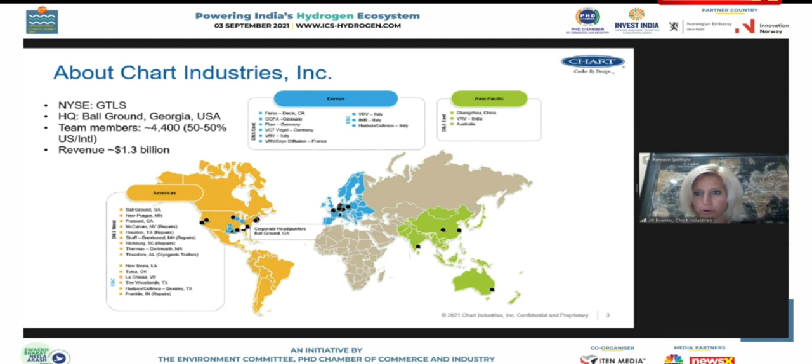I expect that will continue to unfold as the clean energy transition unfolds, in particular because there's varying degrees of funding, varying degrees of support in the current state for the different renewables that are growing and growing between now and 2040. This is a set of pictures of the different types of equipment, and it's very important that we think about this around the fact that you need infrastructure in order to achieve any of the targets that are out there.

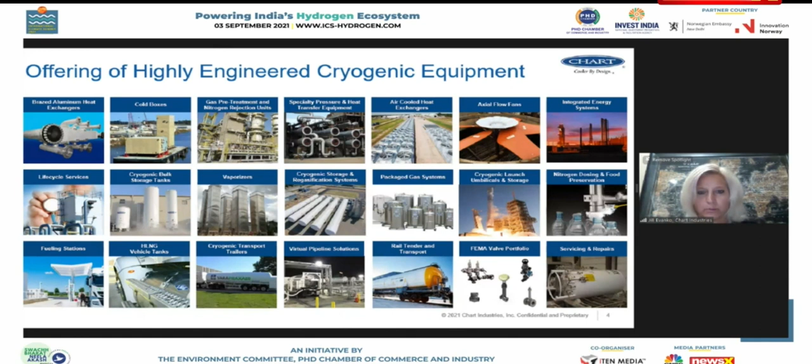So I show these pictures to show the variety of need of infrastructure, and I'll go into some descriptions of these, but all of these are really utilized in the combination of how clean works together. So clean being sustainability, being around ESG, and this isn't just around clean power, it is the combination of water and power and industrials. And that's something that's very important when you think about how the next decade is going to unfold, in particular around renewables.

I show this because it really is, how do you create the opportunities for the variety of different applications to work together in what surely will be that hybrid of solutions.

It's also important in the discussion when we're talking about how to fund, that we talk about the industry groups that participate in the energy transition and how you participate in industry groups such as Hydrogen Council, such as the India Hydrogen Alliance, in order for the industry to build upon itself and to find those various different ways of funding, whether that's green funds or other ways to get the money to kickstart the economy that is still very nascent.

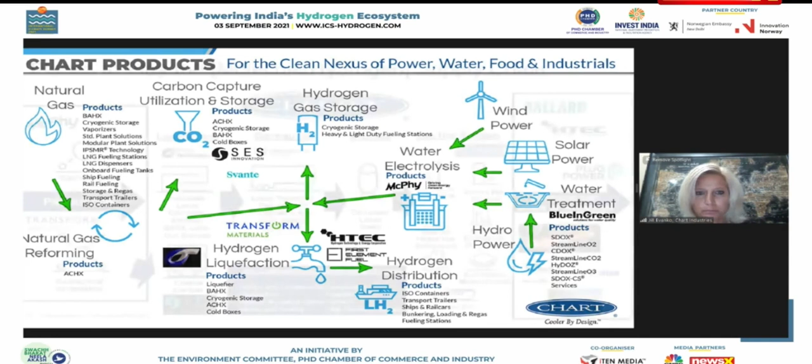As we talk about hydrogen, this is the value chain that I briefly spoke of at the beginning, and you can see that there's a variety of different pieces and parts in this. Perhaps the most important part of the discussion is, how do we get into the projects and get them moving, and what are the right projects for hydrogen, so that we can have this be a cost competitive part of the solution, as well as have it be scalable.

That's what you see really in the natural gas economy. That's what you also see in diesel. So we're talking about having the funding and having the investment in order to drive cost competitive and scalability for the hydrogen molecule when you compare it to other answers for power and fuel. So how do we achieve that?

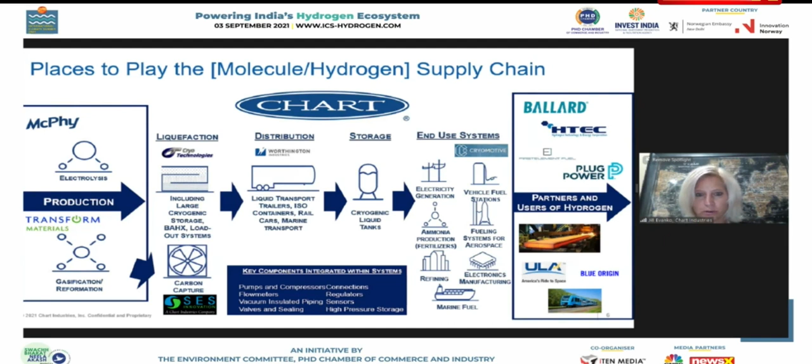First, let's step back to the macro picture of what's happening in the hydrogen economy. First of all, hydrogen is hot, and I say that somewhat jokingly because it's actually one of the coldest molecules at negative 423 degrees in the market. But we've been manufacturing hydrogen equipment for over 56 years, and it really wasn't until the last couple of years where it became a topic that was very real and tangible in the market as part of the drive for the solution to clean.

So you can see on the left-hand side that there's over $500 billion of investment in projects that have been announced in the last 12 months. 150 billion of that 500 billion investment has been announced since February of this year.

So the increase in funding and availability of capital to do these projects is a key part of the change that's been happening in the hydrogen industry. Historically, hydrogen was really used in space applications, space exploration, whether that was the Indian Space Research Organization or NASA in the United States. And now you're seeing it utilized across a variety of different applications that I showed on my last slide.

So there's also a perfect storm of activity, whether public or private sector, happening right now. If you look at the various governments around the world, you see 31 different countries that have national hydrogen strategies. Of those 31, more than half announced those strategies in 2021 alone.

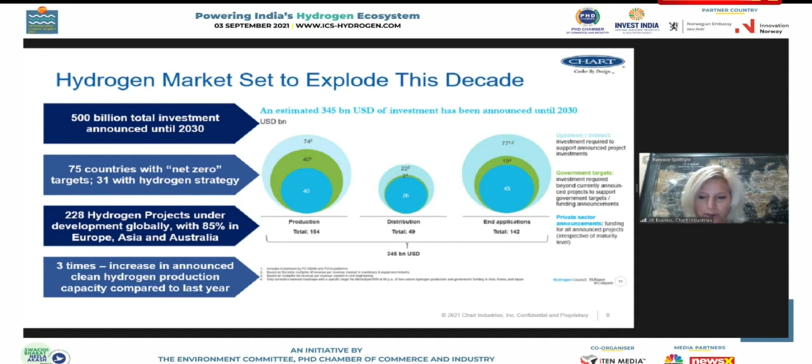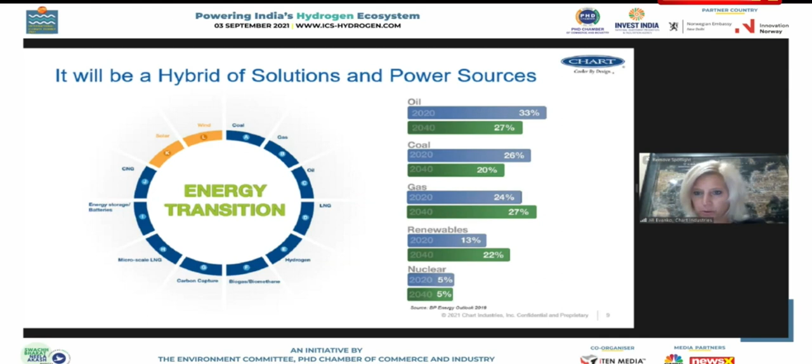And I talked about the types of funding.

Now 75 different countries have net zero carbon emission targets. One of the things that's important in order to achieve these is, as I talked about earlier, the industry groups. So there are various private sector companies working together in alliances to make sure that the governments being supported have the information on how you go about this, and how you take that government stimulus and carbon credit program to spur investment and advantage hydrogen as an example, but also make sure the industry itself finds ways to continue to operate over time without being dependent on public sector funding. So that self-sustainability of the industry is an important factor in how the hydrogen economy unfolds going forward. Utilizing public sector funding should be thought of as temporary help to kickstart investment, and then how do you make this a self-sustaining event?

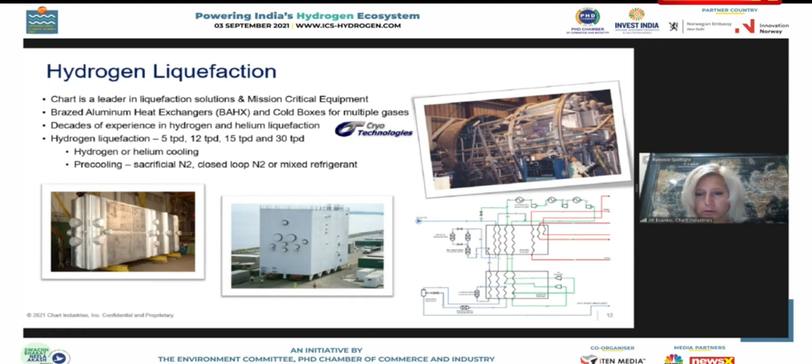We're also seeing a lot on hydrogen tanks. Whether gaseous or liquid hydrogen, you need to have a place to store it. That's both at the front end, the production site you saw on the value chain, as well as at the end use site, whether that's a fueling station or a warehouse utilizing hydrogen for the molecule in whatever application is being used. Just a fun fact to share with you, we at Chart have built India's largest liquid hydrogen tank for ISRO. That was just done last year. These are large tanks, and certainly having the capability and safety elements around this is another part of thinking about how do I make sure I'm getting the right funding and the right quality associated with handling a very important and dense molecule.

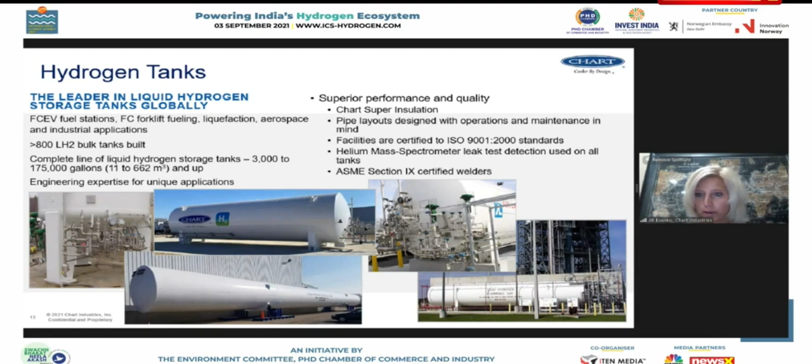And that is a key indicator that hydrogen projects are being funded. The more you see the transport of it, the more it means there are more production sites. That's important when you think about how you get these projects funded.

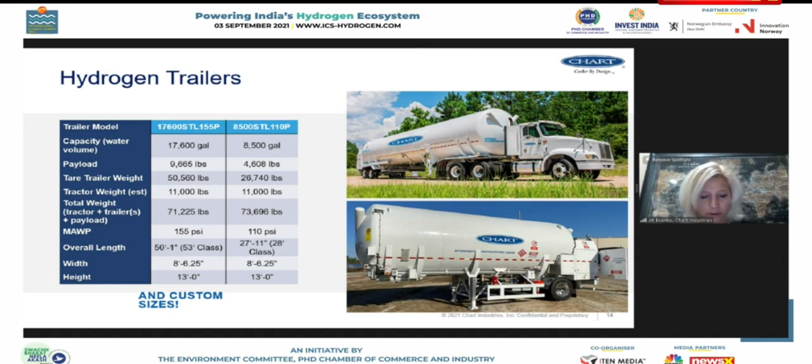The other piece of the puzzle to think about with green funding is certifications. Right now certifications are very regional, but make sure you're prepared for this being a global economy. That's why investment today is extremely important.

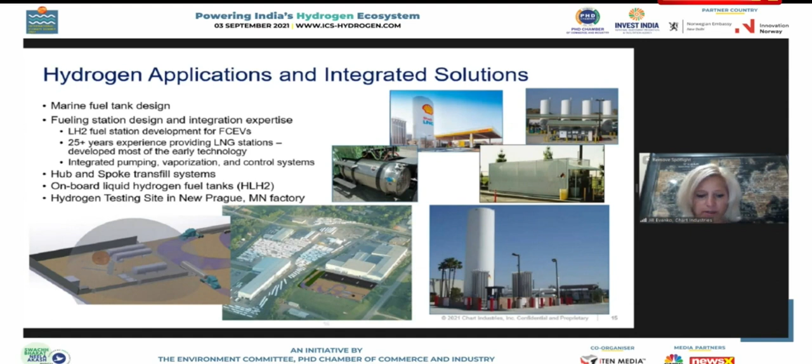To talk about the size of the market is really important. Hydrogen currently is less than 1% of the total global power or fueling economy, and we expect it to be 16 to 18% of the energy around the world by 2050. That's a significant increase in terms of the amount of investment needed to get this moving. From our company's perspective, hydrogen is the number one area we expect the market to expand dramatically over the next 10 years.

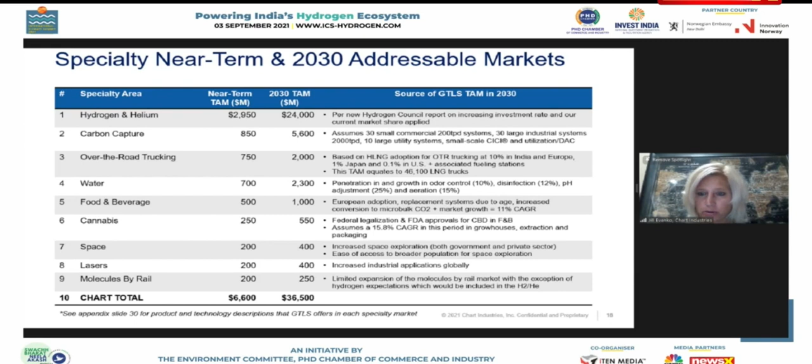It's important, again, on public sector incentives and stimulus that policy supports it, and there are ways for the economy to have access to that capital. With policy support, the hydrogen economy could produce millions of jobs by 2030 and be multi-hundreds of billions of dollars into the economy in that same time frame. But ultimately it has to be self-sustaining - somebody has to pay these people that are going to be working these jobs.

One of my favorite questions, I've kind of hinted to it, is this going to be a global economy instead of a regional economy. That's really important when you think about the pricing model - is this going to have a spot market like natural gas? There's plenty of hydrogen-specific funds already out there, in particular in the EU, that have benchmark pricing, ways that you can play but not be fully exposed to one single hydrogen investment or project.

Lastly, collaborating and partnering. You saw this on the prior slide - these partnerships are really important to build the economy and have it be ready to play in this decade. You have to think carefully about who you partner with, because there are long-standing relationships that result from that, and how that works in terms of where you want your company or your investment to be.